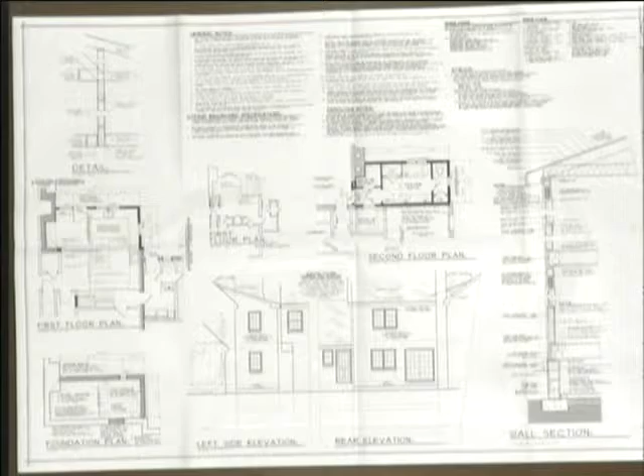This shows where the addition will be. It's a little deceiving. This is the existing part of the house, and the addition will go above that to become two stories. So the existing breakfast room is a little smaller than this footprint, right? Yes, sir. Okay, so you're basically taking that down, making a slightly larger footprint, but it's a two-story piece.

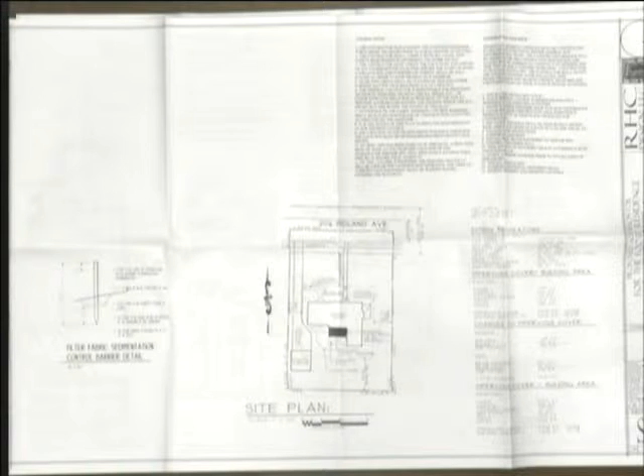Yes, sir, and matching materials—we're just going to continue with the smooth coat stucco. It'll follow along the plane of the house where, in the first diagram, the side of the house kind of steps down. I can pull that back out.

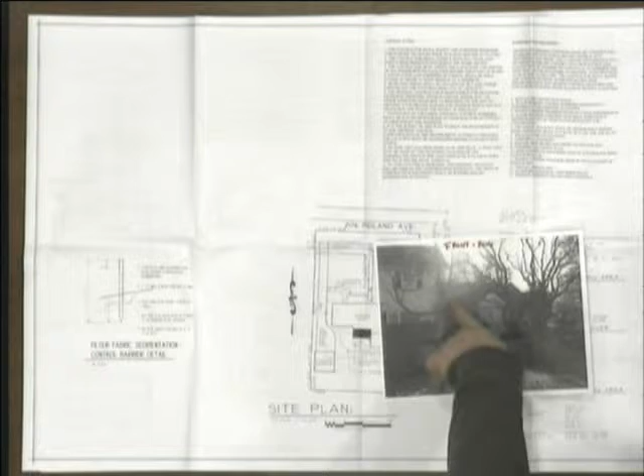On the back of the house, this plane of the house will continue along, so it'll blend in. The current breakfast room is built on slab, not very well done—looks like it's had some problems with the previous owners—so we're going to put it over a crawl space and continue it across to make a larger kitchen.

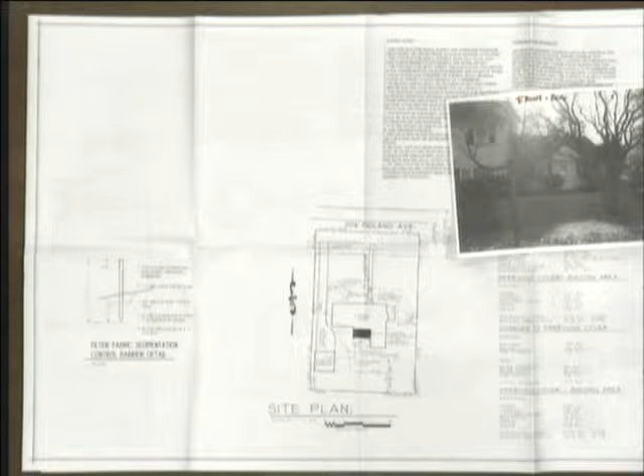So this is an addition that is virtually impossible to see from the front, street level, right? Yes, sir. The existing piece, it seems you would not be able to see it, but when you go out to the edge and up to the second floor, maybe you can see a little piece of it. It would be possible if you were down on the western part of Roland, looking across, where you may see that side plane of the new addition.

I know on the elevations, it looks like you had a brick sill shown for the new windows in this addition. Is that something you can really do in a wood frame, or? Maybe we should just talk about that later. You guys have anything? I guess they're trying to match the brick sill on the rest of the house. Yes, because the existing house is concrete block and stucco, and this is a frame addition with stucco, so that's kind of a different detail to do, so I didn't know how you were going to do that.

We'll probably use a veneered or half brick to continue that kind of rowlock across there under the doors. So you do intend to do that? Yes.

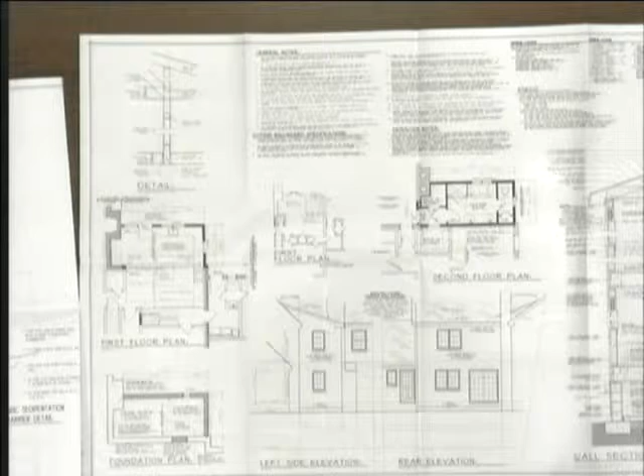Got any questions, John? No. No questions? Andrea, anything? No, I don't think so.

So the top of the second floor then will be below the ridge of the original roof, or will it come up to, looks like it'll be below the ridge of the original roof? Yes, ma'am. It'll come slightly below the original ridge. It will not tie into the existing ridge.

And all the roofing, it'll match the original roofing materials and everything? What will probably end up happening is that we'll probably be doing all new roof on the back of the house when we do this, and then in a second phase, we're looking at some future work to the house. We may do the front of the roof as well, but currently it would just be an asphalt shingle, matching as close as it can into the color of the existing.

And the finish of the stucco will be similar to what's there now? Yes, ma'am. It's a very smooth troweled finish, actually sponge finished.

All right, any motions? Public comment. Oh, yeah. Any public comment? Okay, go ahead.

Well, it's a pretty simple addition, and I think you've tried to match the fenestration as much as you can and blended everything into a really nice ensemble. Thank you. And the mass is kept consistent with other houses in the area as well as the existing structure. So I'd like to recommend, motion to recommend a COA. I'll second. A second? Okay, all in favor? Aye. Okay, 4-0, you're approved by us.

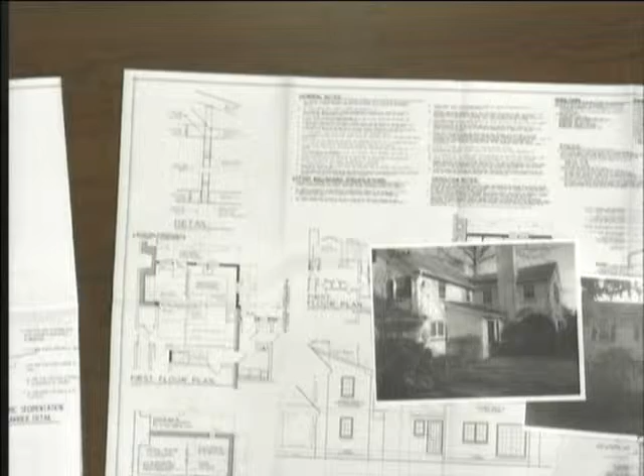In this area here on the addition? I mean, that return is what I'm talking about. If you were to sort of try to match that on the return of the new shed. Oh, I'm sorry, here, that one, yeah. Okay. And if you have a problem with, I know you've got a kind of, the rake of that roof is trying not to go off of the other roof.

You're trying to kind of minimize that. If you could just take the gutter and wrap it around that corner and then drop a spout there, that kind of gives you the same look. It's real simple.

That's the only comment I have on that. Absolutely. Okay. Thank you very much. Well, thank you. Thank you very much. Thank you.

Okay, we have next on the agenda, HARB 2013-2, 319 South Wayne Avenue. We have a first floor addition.

Thanks, man. So please introduce yourself and show us what you're doing.

Good evening, everyone. I'm Craig Miller, CI Miller Company, Builders and Developers. And beside me is architect Jack Aldhouse, Aldhouse and Associates. We're a little bit unprepared. We don't have a plan with us, but we knew, I think we had given you 7 sets. Why don't I give you one, because you need to be able to show them. Great, thank you.

Unprepared for class. It's okay, we can manage.

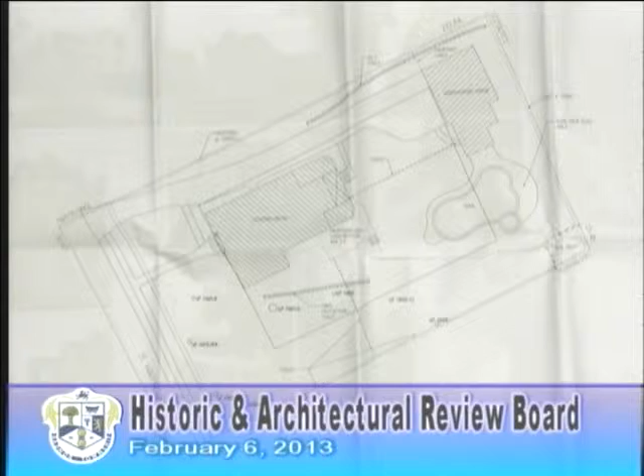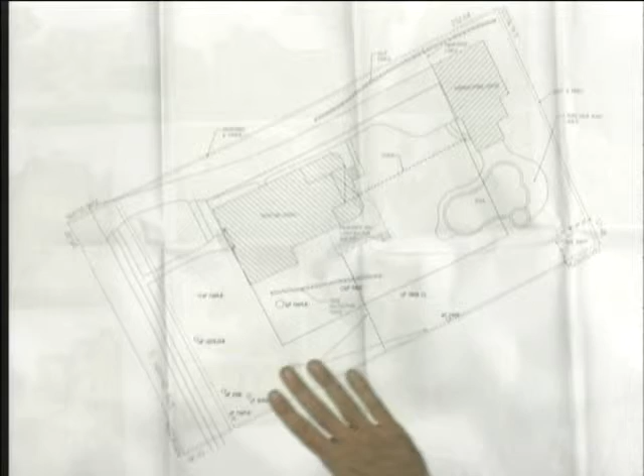What we're proposing is an addition to the existing house in the rear of the property that would provide a family room to help tie the inside of the house with the existing pool and backyard area. The home's living floor is currently fairly high from the grade, almost 4 or 5 feet, and the challenge was they wanted the house to step down and flow towards the pool, so the indoor and outdoor spaces flowed better. It was a lot of fun to work on, and what we came up with was an addition on the back of the home.

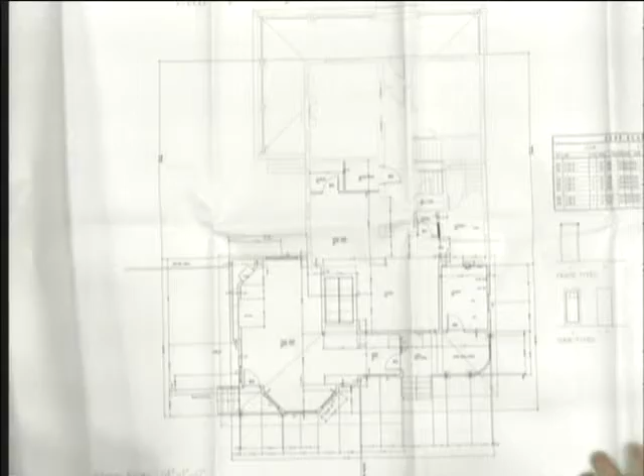Let's see if this works. There you go.

Perfect, okay. This facade right here is looking this way towards the addition of the home. Does that help? Mm-hmm, okay.

This is the existing home in its current outline, and there's a wraparound porch that goes this way. We're proposing to remove this portion of the porch and alter this portion so we can have fewer steps to get up to almost a midpoint on the porch, and then a few more steps up to the main living level into a new drop-off zone for groceries and laundry, kind of a mudroom entrance for the children.

They have 5 children, I believe. 3. 3. I have 5 children. They have 3. Okay, you're going to need a bigger house. It's been a long day.

From there, they can go into the home, and if they have a large gathering while entertaining, the children can migrate back upstairs to the bedrooms through here. This can close off. The existing kitchen will be redone, and this room here, currently a dining room, opens up inside, so this whole existing part of the house now looks down into the new proposed family room, which then looks down into the pool area. They're very excited about how this works - they can come down a few steps into the family room, then outside, then down a few more steps inside the pool enclosure area to enjoy the pool.

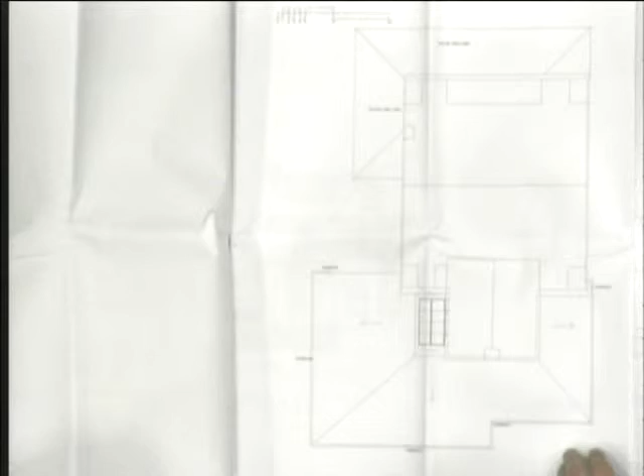That little outside porch, that was added over time, right? That's not original to the house. I'm presuming that corner porch - this existing porch here - that's right, that was added at some time. It looks fairly recent, to tell you the truth. I think the last work was 2004. Gardner Fox had done something there. I don't know whether it was before that or not, but the new owners have been in the house since August.

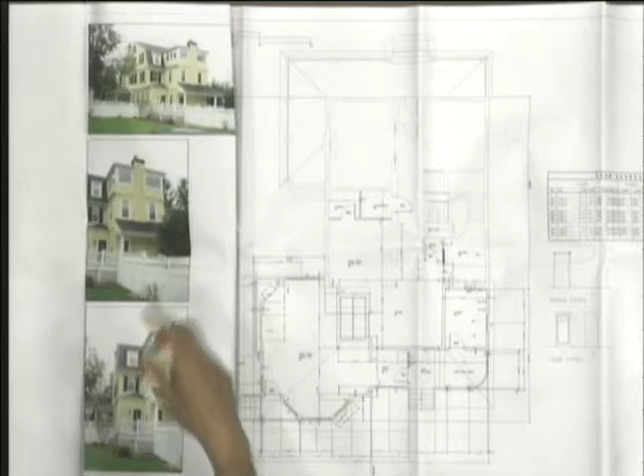The 3-story wing in the back, that appears to be just added on to the original house? That's pretty old, I believe. This section here, it looks like there were some alterations done maybe downstairs - the kitchen, existing kitchen, and a pantry area next to it. These areas appear to have been altered during the same time the porch was added or modified. But this piece here, the upper floors, walking around it does appear to have an older construction date, maybe 1940s or possibly earlier, but added to the original house, I believe so.

Yeah, that's what I'm saying. Yeah, that third floor, sorry, I have a slight hearing problem, so.

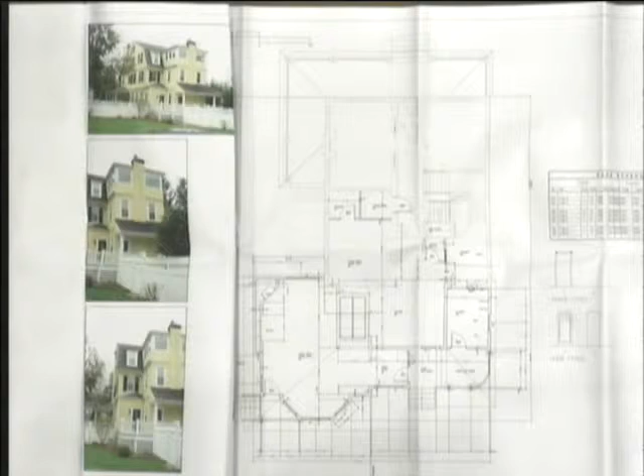The impervious coverage was on the 2004 plan, because they came in around 2004 and added a garage - tore a garage down and a new garage/pool house was added in '04. So the impervious coverage as far as the new addition, we're under the 500 square foot. I think we're at 443 or something like that, staying out of having to do a groundwater seepage pit.

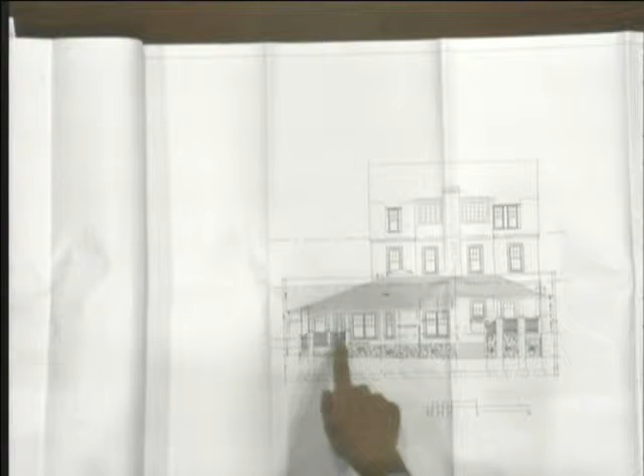We're proposing to match the finishes of the existing home, including the color, shingles, window treatment and style and facing here. At the base of this, we're proposing to put a cultured stone baseline here, so we kind of diminish the height of this a little bit by changing texture and material there. And then for railing style, I tried to mimic what the front porch was doing. I thought that would look nicer instead of maintaining what was already there, so I decided to alter that. That's basically what we're doing.

The column bases - are they going to match the front porch on this? The front porch has sort of thin bases, sort of a rusticated block or some sort of thing. They appear to be a stucco-covered block. They're about 18 inches by 18, and then they have like a capstone, and then the column goes from there. They're actually there now, filled in with lattice in between.

I think it covers them over. That's true, yeah, the ones back here. Right, so we're picking up on that, and I was trying to make the column look a little bit more like what was out front there. Right, have a higher base on it. Yes sir, and we raised it.

Is the stone on the rest of the house a kind of rubble stone like this? It's almost the way the foundation was laid up, just has a rough parge coat on top of it, and you really only see it as far as it's lower than water table height. I only saw one little tiny corner, couldn't really see the rest. But that was the idea, that you would try to match that base coming around.

I don't have a good photograph that shows the existing detail on moldings and overhangs and eaves, but you can see a little bit of it here. We'll throw the crown in and just maintain what the exterior of the house looks like.

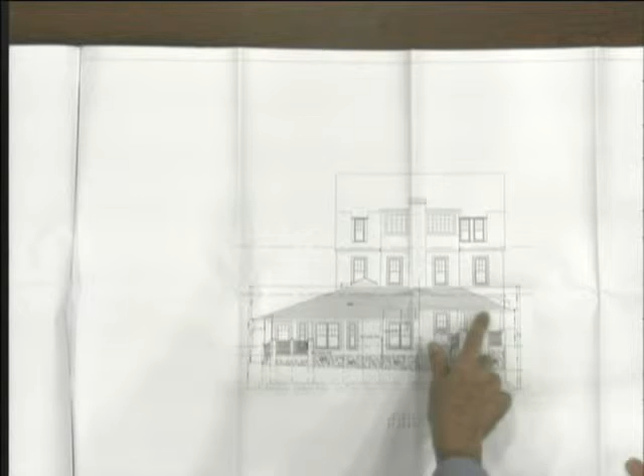It should be pretty fun to look at when it's finished. Yeah, it's a beautiful home. Really, it is. That color really makes it pop, too, and it looks like it's really maintained well.

Yep, the yellow house. You can keep going on the elevations, but once you're finished with the elevations, I want to go to the roof plan, if that's okay. Can we see the sides of the other two elevations?

This is a side elevation. It shows how the roof sweeps along the side here. This wall on the inside is an entertainment center, and a flueless gas fireplace is located there, so that's why there's no fenestration here. But we heavied up the fenestration on the back side, so there was quite a bit of view towards the yard.

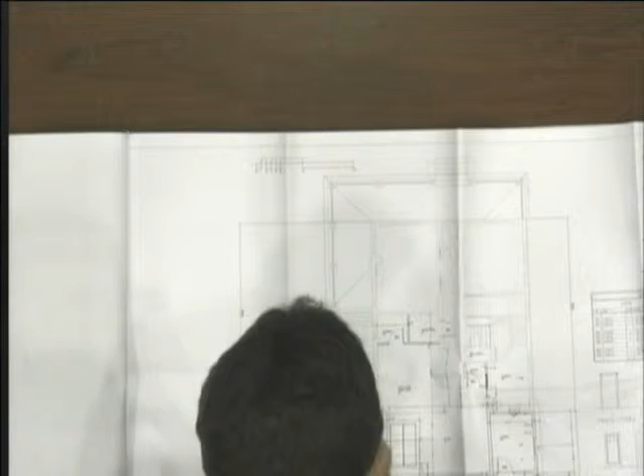Does that new section, that wall you were just mentioning, project out from the house? Yes, sir, it projects out 14 feet from the face of the house. This is the fireplace here, and this is the entertainment center here.

Do you have a proposed elevation from the front, from the street, that shows what it will look like with the new addition? I apologize, we didn't include an elevation from this side. There is a double window here that would match the windows we're showing on the back, if that's any help. Most of this elevation is shielded by the existing porch, which extends out to this point, about 8 or 9 feet.

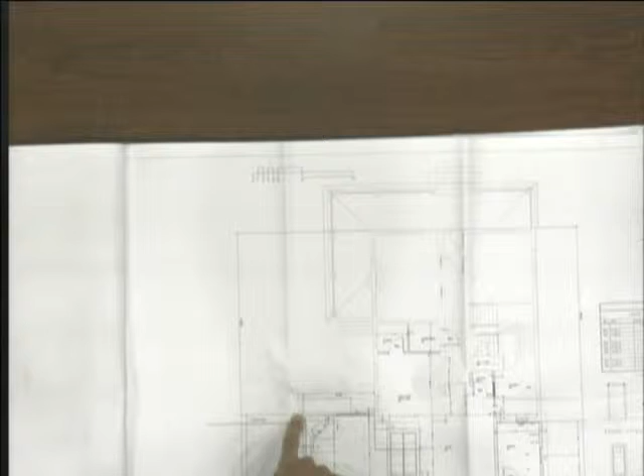And then the addition in the back would go out a little further than that, is that right? Yes, this would protrude out 14 feet, so I believe the net difference is about 5 or 6 feet of additional protrusion.

If you go to the roof plan, I can explain - that edge is the only thing I have a problem with on this. This edge here: the front porch has hipped corners, the way it does everything, a double hip there, everything returns back to the house.

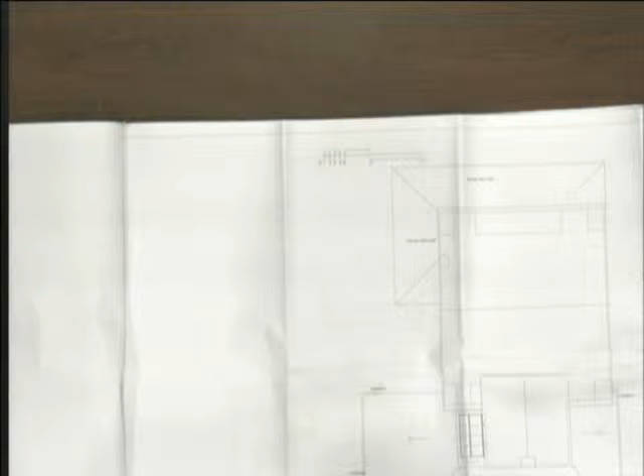You kind of start that way on the other side, you come off of a mass and then you just kind of hip around, but then it ends up being this kind of chop. I know you've got an indent, a skylight, and all this stuff to deal with in that corner.

It got a little crazy. It would be really nice to see somehow - you've probably looked at this a million times, but is it possible to hip it around? It looks like it might be kind of a problem, but you know what I mean about that - just wind it around the corner.

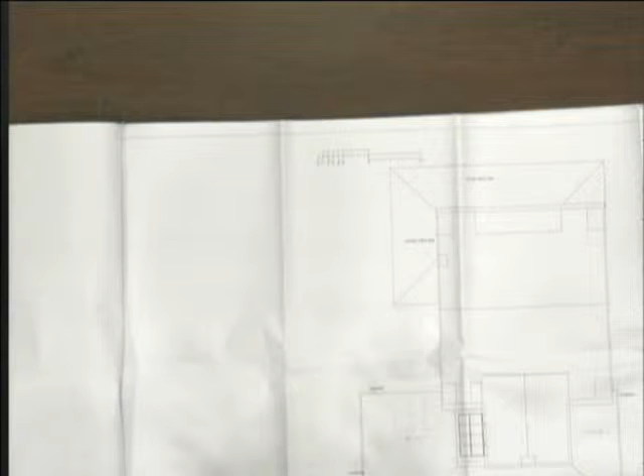It's one of those things where in architecture they tell us, if you're going to do it well or don't do it at all, because in between looks like a mistake. So I hesitated to try it, because if I was going to do it, I would probably start here and fold it down, since that would make sense architecturally.

However, you have an inside cricket in here. Inside, what we'd lose is the owner's desire to have a cathedral ceiling effect over the entertainment area. So that's why I maintained a monoslope there, and I was hoping that would work.

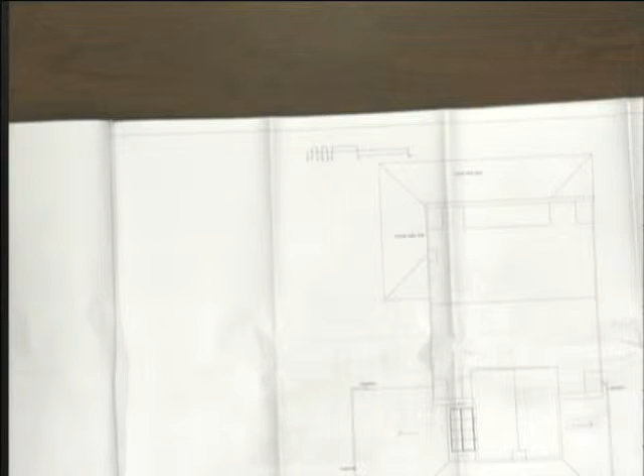Also, you have a window on the first floor problem too, I think, because that roof line would get longer towards the front of the house if you hipped it, and probably land right in the window below. If you look at that side elevation, that was the other problem I was looking at.

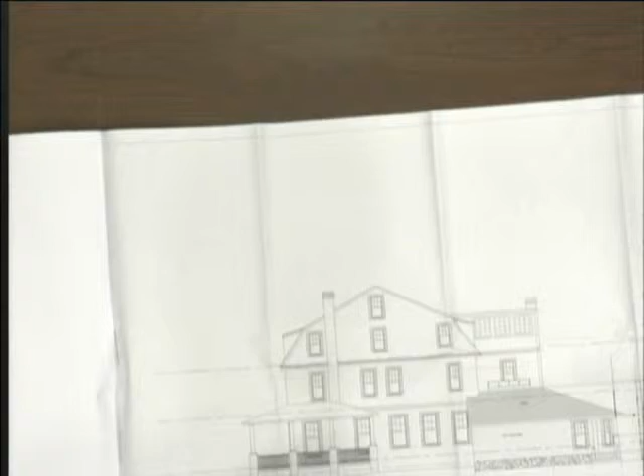If you were to hip that straight edge like this, the roofline would have to stick out further and extend into the window, returning right into it. So that's correct - it'd be like their original plan. The homeowners have all their equipment, their condenser units, over on this side.

Here's a thought, I'm just winging it here. The upper portion of the house has a shingle-style facade. Let me get to the photos quickly. Along here - where's my finger - okay, along here this changes to a horizontal siding that almost feels like a shaker style.

Where that flare is, where that triangle is above, if that were to change siding so it wasn't shake all the way up - just make it more of the horizontal board - maybe that would help soften the shake effect, because that demarcation happens all the way around the home.

That was kind of the next phase - is there a roofline we can work with on that side? If it's going to stay, what does it look like? Because we don't have a view of that.

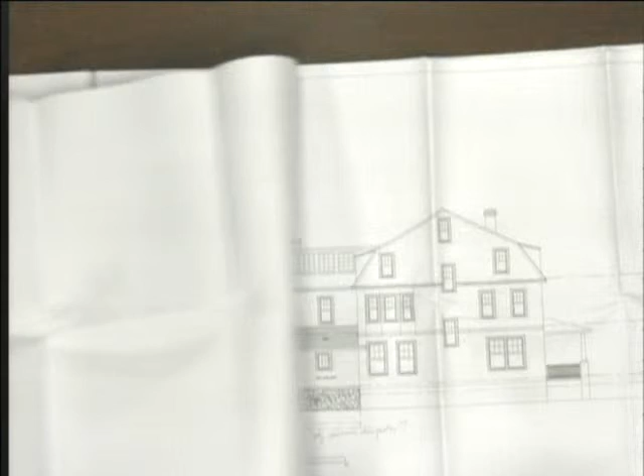So this is exactly what we need to know - that you would take stucco up to a line, which would be the soffit line of the roof, or the return. And then above that, you would go to a horizontal or cedar shake. Right here at the existing home is where that finish changes.

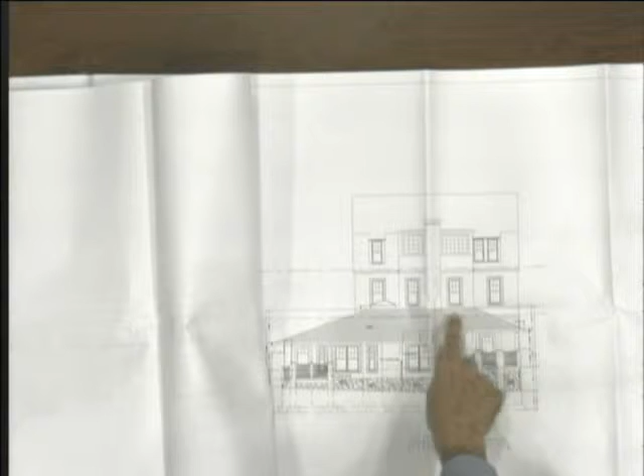I don't know if it shows up in the photo, but right here the photograph indicates that there's siding at that clip. So if you can imagine that going around the corner, I think we were going to put an eave extension in, infilled there as solid beneath it - that's what he's talking about doing.

I could also introduce a shadow line there, have the siding pop out a little bit, 3 or 4 inches, so that we get a clear break there between the finishes. That would help prevent it from looking developerish.

Maybe we can include that flare and put an eave extension on that end - put a one-foot overhang, and as you come down to the stucco we'll put the swoop, the little flare piece, that you see all around the house, running between your second floor and first floor. And that'll maybe pull that end back into what exists - is that a flare in the shingles, in the shakes?

Yeah, that's up higher though, I think - up higher than where we're talking. So you're sort of going to end up with that detail that's on the shed now, and that probably is all you need.

Put that water table back in, a piece of millwork - I wouldn't do more than that. I wouldn't try to mimic this, I would just let it do what's happening. That would make more sense, I think.

You're also having a sliding door there, so that'll break up the bottom mass. We have a double window there with a low sill. So the windows would be similar to what we're seeing here, set a little bit lower because the floor drops. So I would try to make those windows look like the same as these, so they go together.

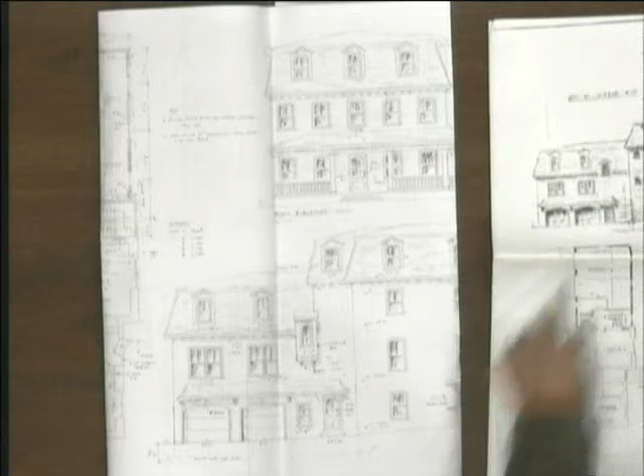And as we've gone through the building permit process, we've had to make some changes along the way. We originally had to use an elevator, and this plan was designed in accordance with that, but that really prohibited the budgetary constraints of this renovation, and we eventually were able to convince them that we didn't have to conform to that. So we were able to eliminate the elevator, but that shifted a staircase, which is this part of the building right here. And in doing that, you'll see that it led to a couple of changes in this roof line here. The original building doesn't show this little bump out, and the dormer's a little different right in here.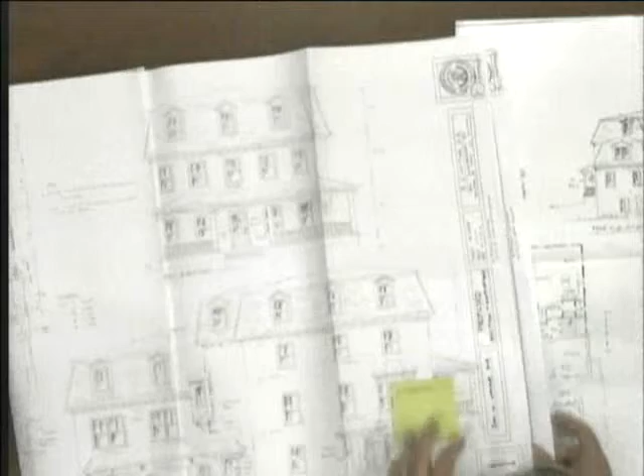There are no changes to the front elevation resulting from that as we went through the process. But I believe there was also a change to the... I think that, from what I saw, the overall size of the addition is almost identical. The overall size is identical. It's really just the roof lines and that window placement created by the stair tower flipping, and eliminating the elevator.

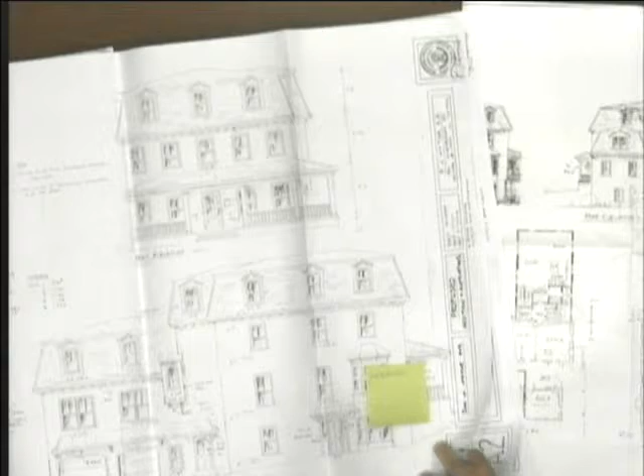I'm trying to recall, you've been here about 3 times, I think, at least. Well, at least 2 times - we were here once for the original approval. Then, when we realized the financial burden of the way we were trying to do the addition - this is an older building, and it's a multifamily building, and unlike a normal home, if someone renovates, they can renovate what they want but leave a lot of non-conforming things the way they are. They don't have to go back and redo the house.

We, on the other hand, have to go back and basically rebuild the building to make it conform. So we have to go back in and put sprinklers in. There was thought we had to put an elevator in because that's required under the new codes. We have to make a unit that never existed handicapped accessible now. And all these kinds of things led to changes along the way, most of which have no effect on what you see, with the exception of being able to eliminate the elevator. So it got to a point where the project wasn't feasible.

We came back here with an alternate plan to do something different, to actually build some single-family homes, taking the same mass but doing something different. We never got anywhere with that project, so we were going to raise the building, gut it, and then do an addition in a totally different direction to build single-family row homes. That never really went anywhere.

So we went back to working on this permit, and we were eventually able to get rid of the requirement for the elevator. In doing so, this became feasible again, so we kept the permitting process going with this.

So I think this would be the third time we're here.

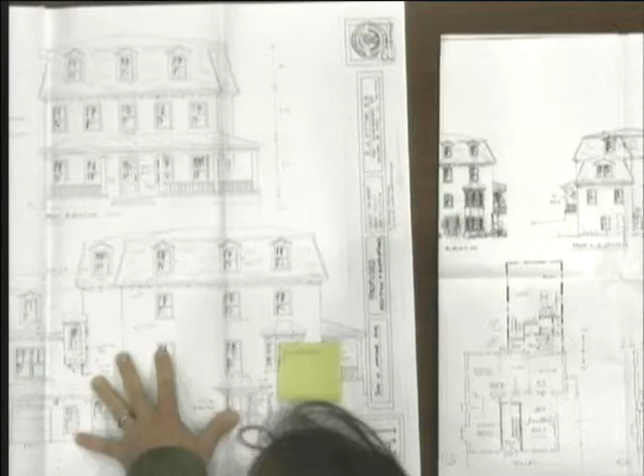Let me see, I'm sorry, I didn't bring it, maybe we can do it like this. There's nothing changed on the front elevation, so you don't have to look at that.

The rear elevation - we're looking at construction drawings now? Yes, okay. Pseudo, yeah. Original, new.

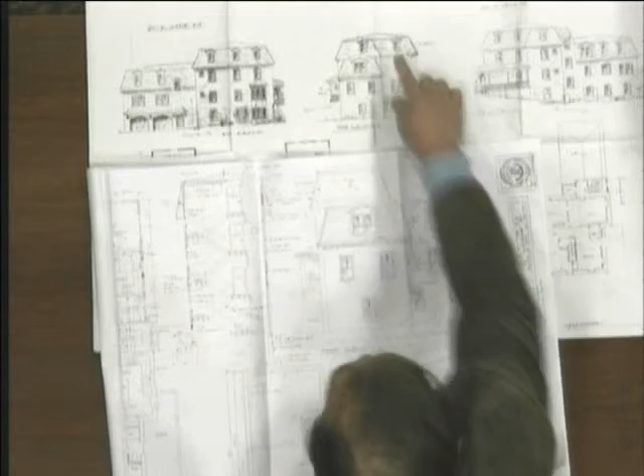Is that missing one window? The dormer is now a double window. That's the original. Oh, okay. And we lined the double windows up all through here, see that. And the highest mansard on the left is smaller than the top one.

See how that works? That's where, when the elevator disappeared, that roof line got smaller.

And if we go to the right side elevation, I like that better - it's a better alignment with those double windows.

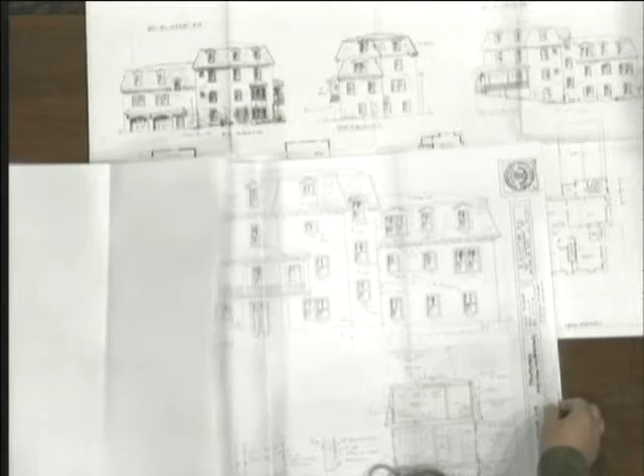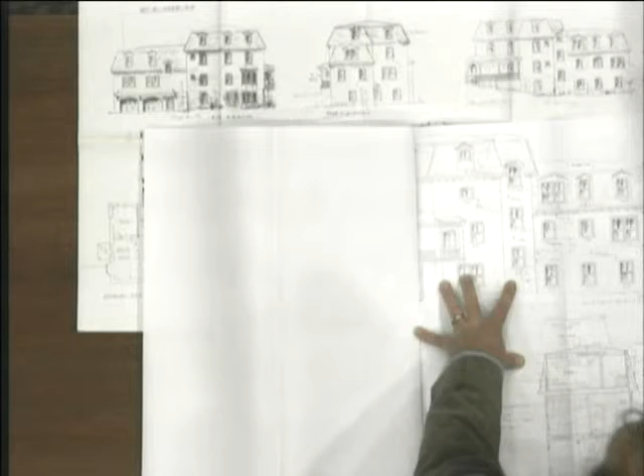We have, once again, this through here now is just slightly different. This little bump out here is a little bit different than originally shown. And he made these two windows, he arched this. I just thought the architect felt that looked better. There was no real purpose for that.

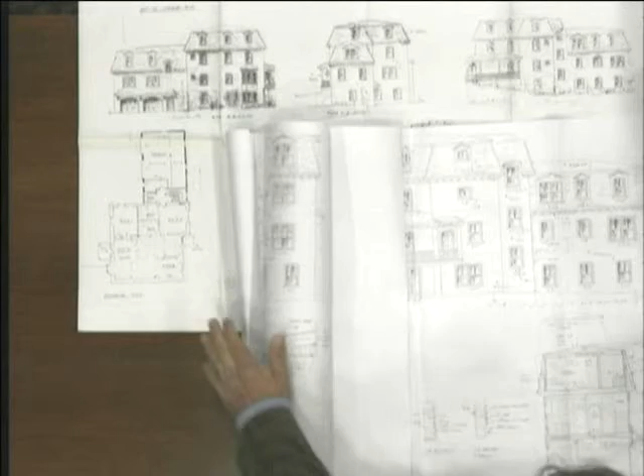So those would be the changes on this side elevation. Now, before, the way you had it, those three windows in that little tower that connects the original building and the new construction? This area here. As opposed to this, the original, right. Now, on the original, it's hard to see, it looks like it was all in the same plane as the new construction.

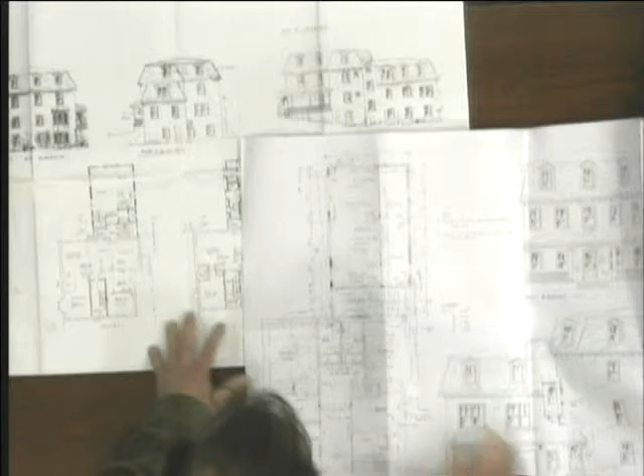Well, the new one looks like it's staggered. There's a little jog in it now, I think. Yeah, there's definitely a jog in it now. But as I remember, I think somewhere along the way we determined the original drawing may not have been perfectly correct. You have the same little jog, really.

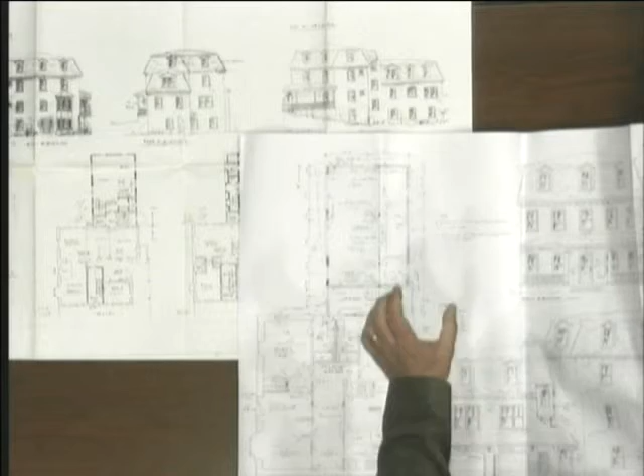What I'm saying is that the footprint hasn't changed, actually. The drawing looks different. It's hard to tell from the drawing what's going on there. I think the original drawing probably doesn't show the jog clearly. Now, this side, of course, you can't see from the street. This is abutting, that's an interior lot, so you can't even see that.

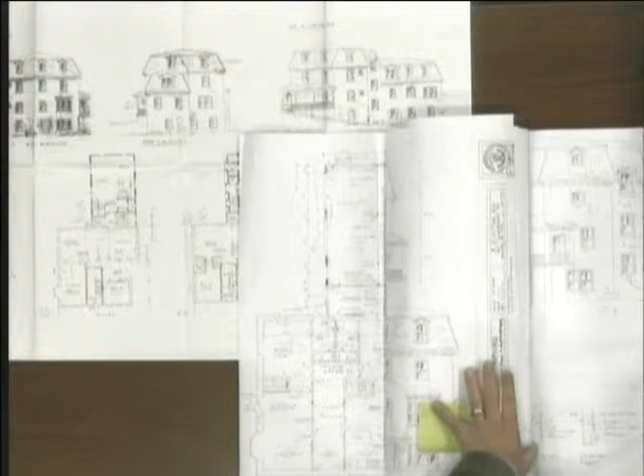Is there any way, is there any compelling reason that you have to go to double dormers on the mansard, in the back, on any of the new work? I mean, the rest of the building is all singles, well, I think. I think it is, let's go up to the third floor and see what's there.

I mean, the one is a bedroom in the back there. That would be this bedroom here. I think he did that just for light. I think that was really an interior feature. That is the back of the property, so it's really not visible, once again, from the street.

The other double dormer is, where's the other double dormer we're talking about? It'd be on the side elevation. Once again, that wouldn't be visible from the street as well, and that would be in the other bedroom. So I think he was trying to just put light into those two bedrooms. And neither of those are visible from the street.

I mean, to me, the massing is virtually the same. Yeah, I think so. The only thing that bothers me a little bit, again, it's the back of the building, and it's the side, is that you have so much going on in the new part of the building. You have the curved windows, you have the double dormer windows, and then you have the flat windows. And I'm just wondering if it's, you know, we're looking at it straight on, so it's a little bit more obvious, I think, than it will be when it's built.

Yeah, that elevation, you know, I think it doesn't, because it is right in a row, call attention to itself. Whereas over here, there's so much going on, I think that's why it's calling attention to itself more. On that sort of south side, that's the south one, yeah.

How visible will that be from the street? It will not be visible because the building actually, your street elevation is this elevation and this elevation. And there's a house next to it, which I own.

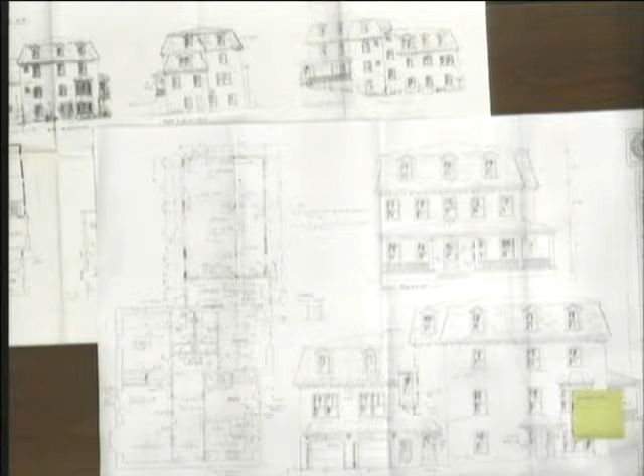So that would be the only property that could see it. I mean, my comment, in terms of the windows, would be those curved windows. They don't seem to relate to anything. Yeah, I don't know where else that came from.

I think if those were flattened, and I understand why the architect might have wanted to do that, because he thought it would bring interest to that facade a little bit, but there's so much going on in that facade with the two double windows that aren't underneath each other, the curved windows, the single windows, and the bump out. There's so much going on there.

And I don't think those curves relate historically to the rest of the original house. Oh, I see what you're saying. Well, on the original approval, there's basically the same thing.

We have the double up there, we have maybe this one window that's flat, changed though. Oh, I see. But look how, they're all different. Yeah, they're all different.

It's sort of minor to me because it's in the back and you don't really see it, but I really don't think there would be an issue with making that window square, rectangular, or whatever shape. I think it's totally minor. I think it carries through, if you're trying to be within the style of the original house, that to simplify it is better rather than to make it more complicated.